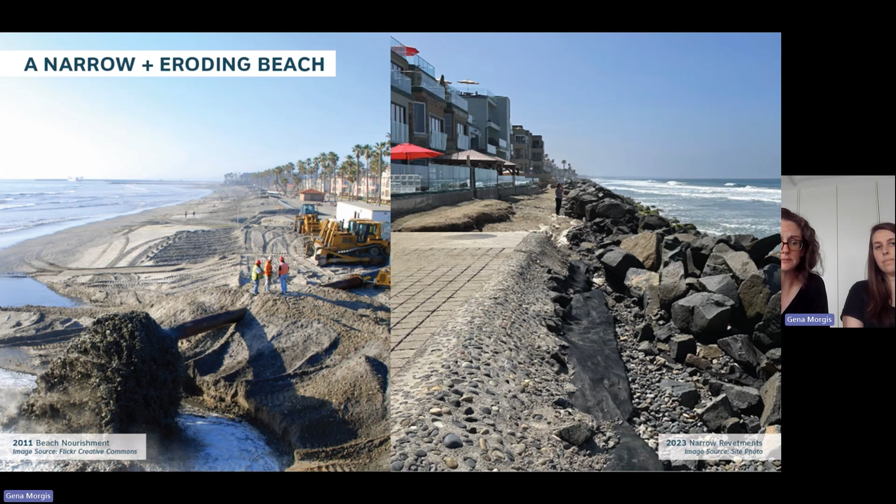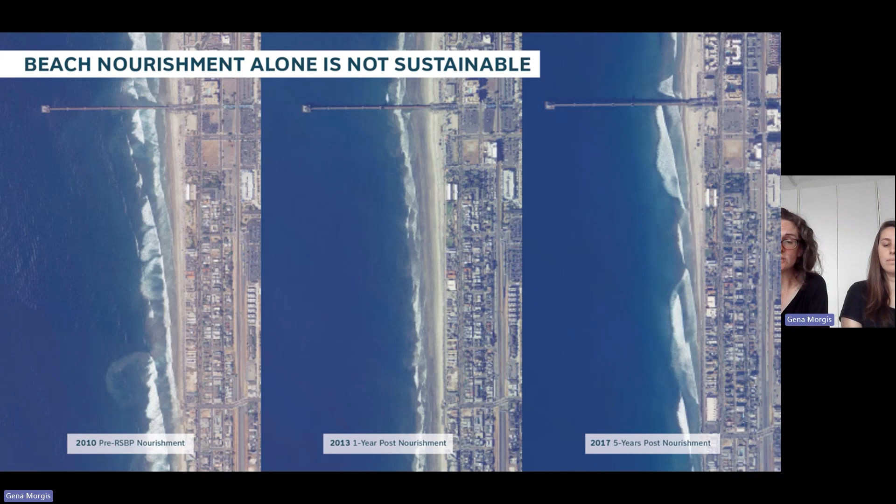But we know that this place is also under threat from both near and long-term risks. And nowhere is this more visible than Oceanside's narrow and eroding beaches. Erosion and accretion are natural processes, but in recent decades, beach losses have been dramatic, leaving almost no beach left for the activities that sustain the places that we love. We also know that Oceanside's beach has been sustained through ongoing beach nourishment, but we know from this competition that nourishment alone is not sustainable in the long term.

We also know that the shoreline faces new challenges from increasing storms and sea level rise, and that these conditions are here to stay. And so to understand how we can adapt for the future, we also wanted to look at the history of Oceanside and Southern California beaches more broadly, to understand how we interact and can craft a design proposal for today and tomorrow.

And what we found is that the beaches we know and love in Oceanside are not necessarily natural. They have been shaped by human hands. There have been times when human actions upstream have increased sediment loads that are transported downstream to the beaches, and others where large quantities of sand have been added directly to Oceanside's beaches. For example, through the placement of material dredged from the harbors and lagoons onto the beach to create the wide sandy beaches we see today.

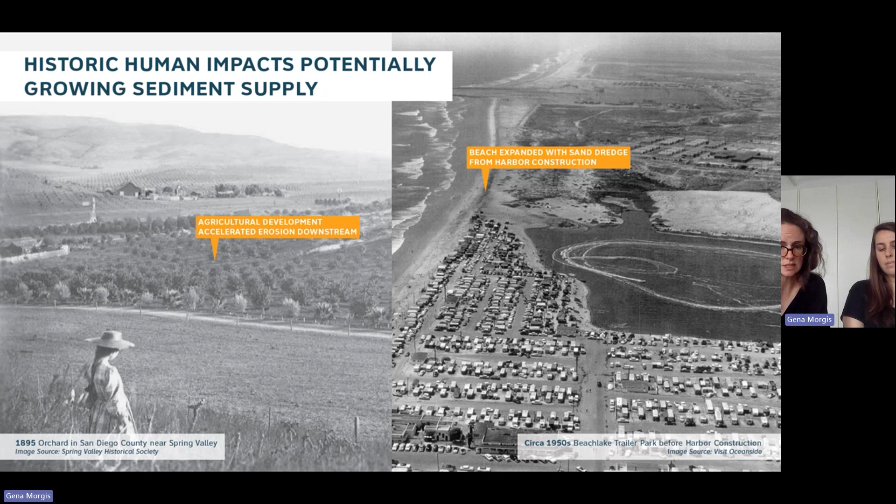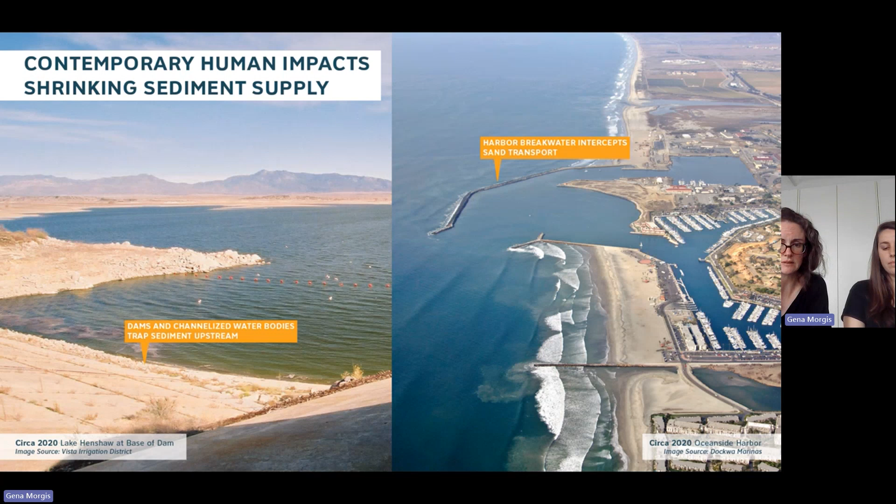Just as human actions have created beach over time, human actions have also started to contribute to erosion, both by cutting off tidal tributaries and limiting the sediment supply through upstream damming and channel hardening, to the interruption of natural sand movement along the shoreline, such as with the construction of breakwaters, coastal developments, and the revetments that go along with protecting that development. And so our approach and the design concept we're here to share with you today is titled Living with a Changing Beach. We acknowledge this change and want to develop an implementable, adaptable, and potentially replicable strategy for Oceanside.

When we spoke to you last, we presented 4 nature-based strategies that we think could be layered along the Oceanside shoreline in different combinations: the cobble spine, the cobble crests, dunes, and nearshore reefs. These are features that will need to be constructed. They are engineered, but they are based on naturally occurring beach conditions and dynamics that we can find in the Southern California coastline. The goal is to adapt these features to the realities of Oceanside today and tomorrow in a way that can sustain and expand your beach.

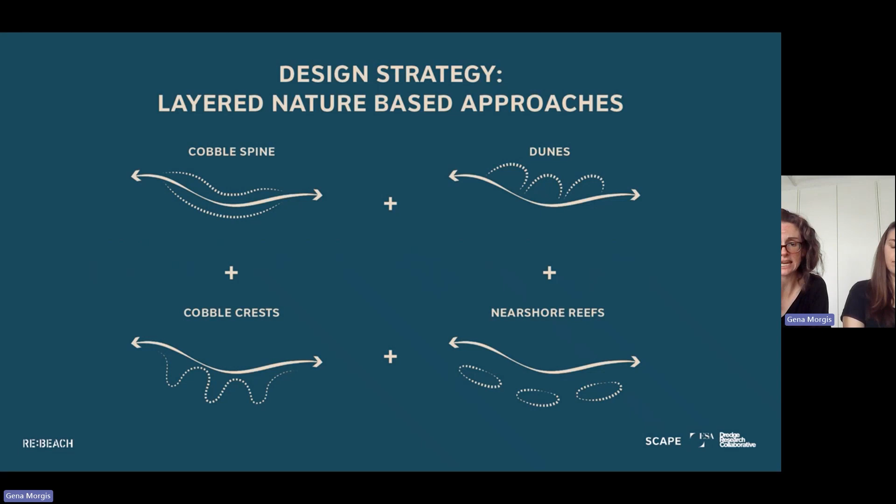First and foremost, that we want to test the ability of nature-based solutions to stabilize a perched beach and retain a usable sandy back beach area. We're going to use and draw from the materials and methods that are inspired by historic conditions of California coastal ecosystems. But we also know that we need to preserve access to a beach and support the vibrant social activities of the Oceanside beach, and do that in the context of our changing environment. So we propose piloting new physical and social configurations at the beach that can adapt to climate change.

And to do that, we want to develop a low impact project that also doesn't exacerbate negative conditions elsewhere. But it's important to be able to implement quickly and efficiently so that we can then study, adapt, and grow over time. There is urgency here. We want to enable you to incorporate those adaptive management techniques and manage the system over time, but also understand it and start to adapt it to new locations.

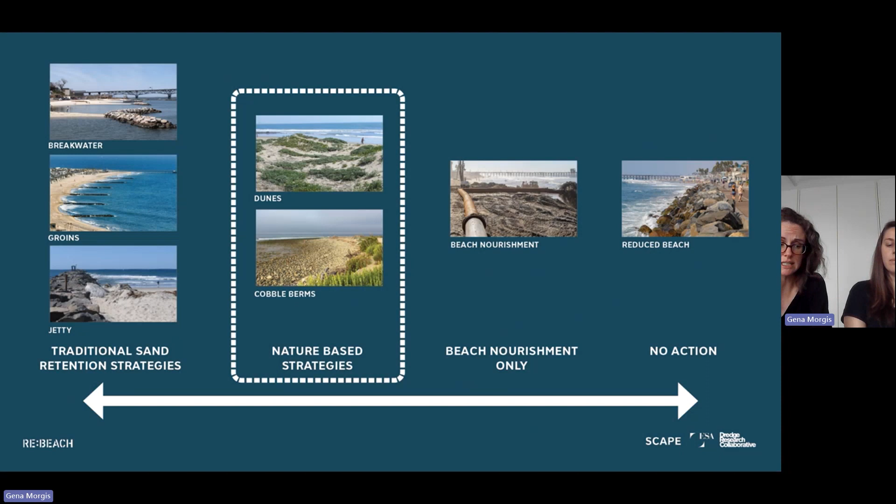And so to do that, we are proposing a pilot that has nature-based solutions for beach stabilization and expansion and tests novel nature-based systems with the potential to accrete sand. By doing this, we really hope to strike a middle ground between traditional hard sand retention strategies and the currently unsustainable practice of beach nourishment alone.

We know that traditional sand retention strategies like groins and nearshore breakwaters can be really effective sand retention, but they can also dramatically change the beach into something that doesn't work for the activities that you want to do there and that may have negative impacts on adjacent beaches. We also know, on the other hand, that beach nourishment alone requires consistent action and renourishment, and this may not be sustainable with the resources you have available over time.

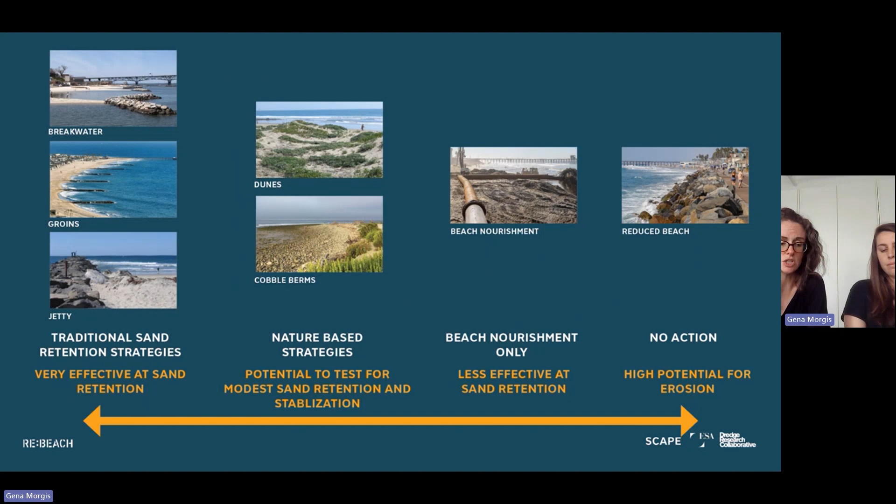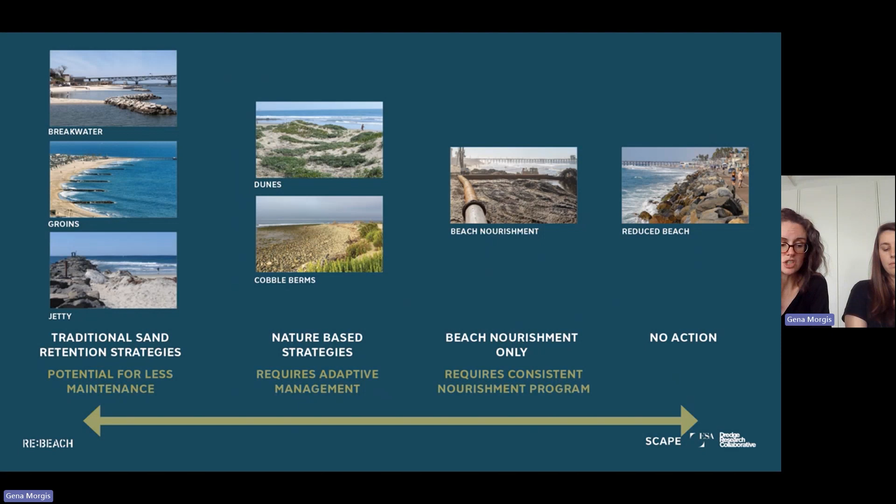Typically, berms and dunes provide stabilization, protection, and some sediment storage. In addition, through this project, we have the opportunity to test the accretion and retention potential of a novel nature-based strategy. And again, nature-based strategies will require adaptive management, but we will test and adapt that over time.

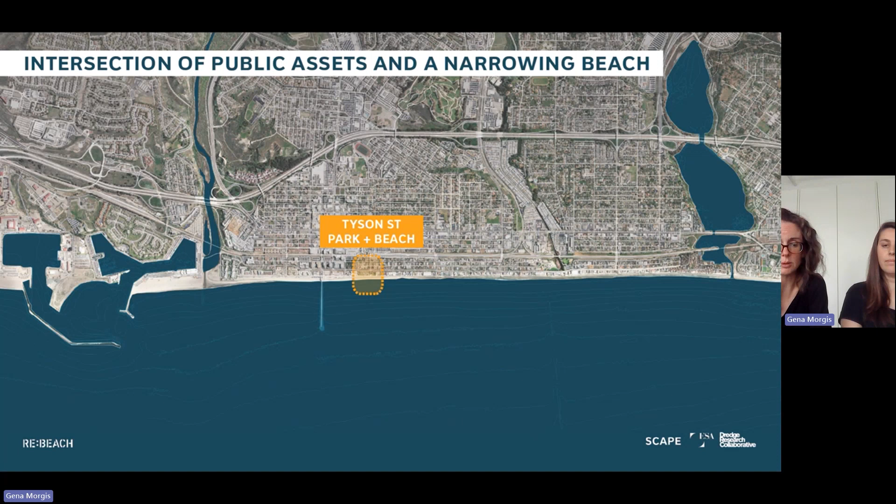So what are we proposing? We are proposing a pilot at Tyson Street Park. This is one project in one place, and we've chosen this place because it is an intersection of public assets and a narrowing threatened beach. The site at Tyson Street Park is already publicly owned land. It contains an existing cobble spine that we can build upon, creating a pilot that can be cost-effective and potentially replicable to other portions of the Oceanside shoreline. And we call this Dune Park.

To describe the design, I'm going to hand the presentation over to my colleague at SCAPE, Gena Morgis. Great. Thanks, Pippa. So I'm going to dive a little bit further into Dune Park and break down the nature-based strategies that Pippa has mentioned in the beginning of the presentation.

This is an image of Tyson Street Beach today, where we see the narrowing public beach, an existing expression of cobble at the shoreline edge, and the strand and the lawn at Tyson Street Park. And when we look at this in plan, we can once again see the tapering of this sandy beach until it ultimately becomes entirely an exposed cobble spine. Tyson Street Park has a lot of lawn and a lot of pavement. It's quite a different landscape than the natural Southern California beach landscapes we all know so well.

In the Dune Park pilot proposal, we combine our 4 nature-based strategies, dunes, cobble spines, cobble crests, and nearshore reefs, to build resilience along the Oceanside shoreline. We propose to shift the strand back toward the bluff and realign the public assets of Tyson Street Beach to create space for native dunes, habitat walkways, and create a new park experience based in native Southern California landscapes.

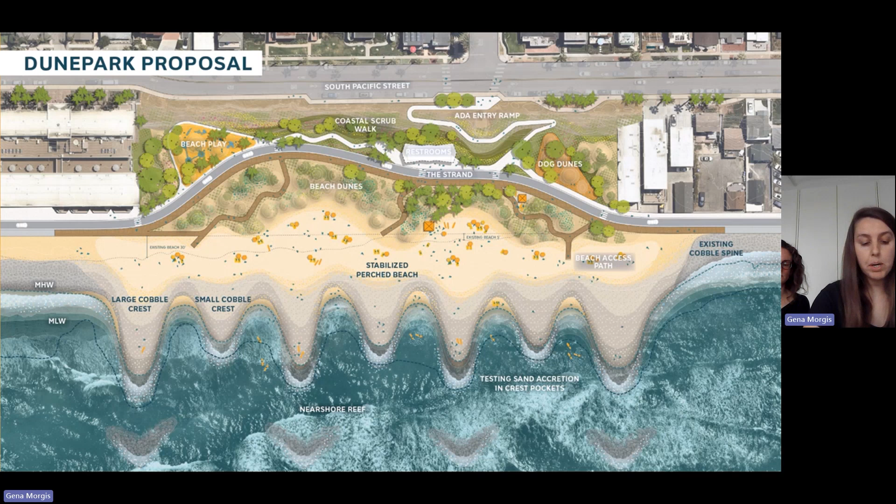This also creates room for a new beach experience at Oceanside. We propose to expand and stabilize the beach and shift the focus to an elevated perched beach where people can recreate and have a new space.

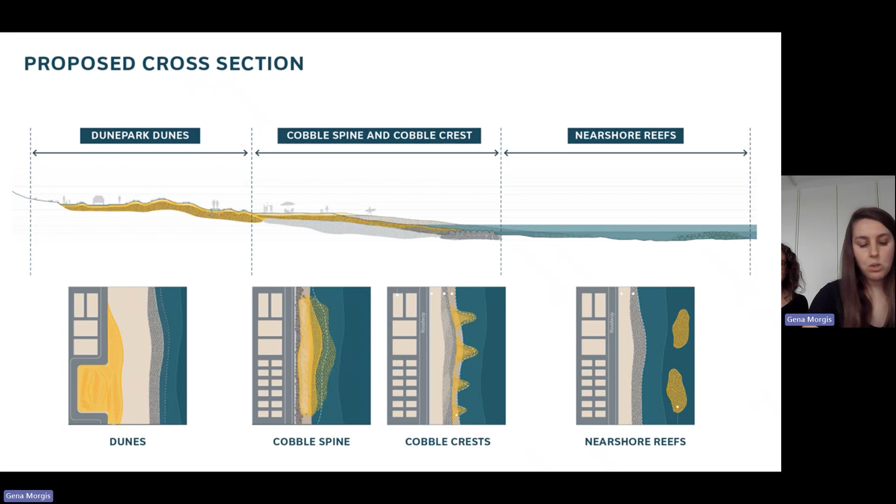Our team proposes to reconfigure this cross-section. What we will do today is walk you through the Dune Park cross-section design piece by piece, starting from the upland portion of the dunes, looking at the beach condition at the cobble spine and cobble crests, and ending with the nearshore reef system. All of the parts of this proposal work together.

While these two projects have different goals than Dune Park, we could look to them for inspiration on how they were able to repurpose local materials, including cobble and dune features, to create innovative resilience strategies. So we propose to transform the static condition of Tyson Street Park into one that is immersive and dynamic, one that highlights a native dune ecosystem constructed with a cobble base.

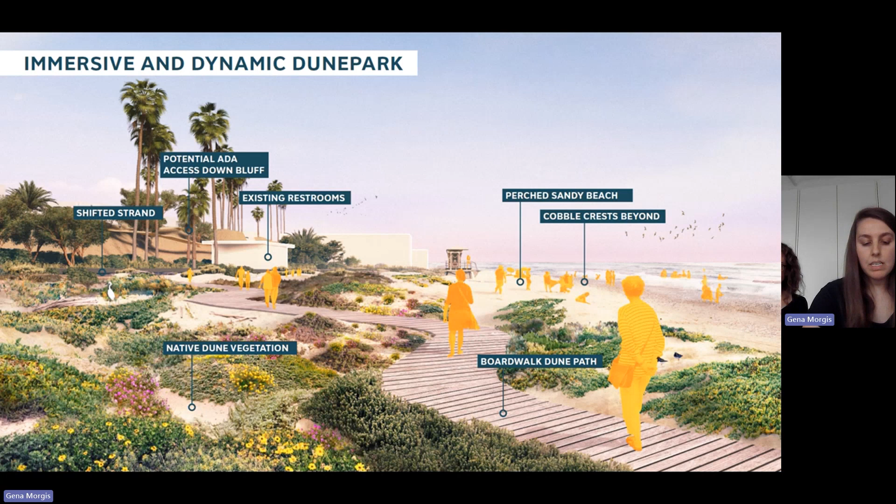We propose boardwalk pathways that move throughout the site, allowing users to experience the dunes. In this view, which was taken from the existing location of the Strand, you can see the proposed sandy beach created through repurposing Tyson Street Park and expanding the beach shoreward with the cobble crests beyond.

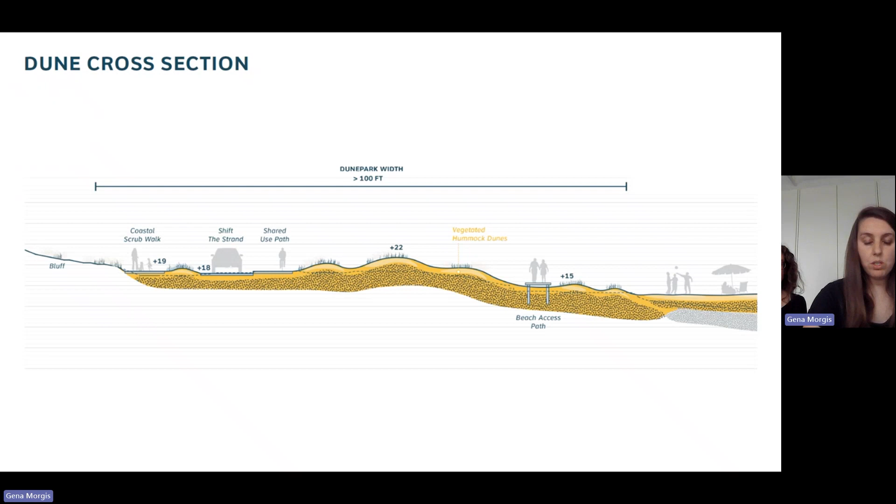And so when we look at the cross-section in further detail, you can see the dune area width is about 100 feet wide. Where Tyson Street Park was, we've converted the grassy area into a dune with cobble and sand. Dunes are designed at elevations that respond to anticipated water levels today, as well as in the future. And we want to emphasize that this space is also a social park for recreation, as programs like the beach play and a designated dog park are incorporated into the dune design language.

Importantly, we've also created a sandy perched beach to really do the things that people love to do on the beach, like laying out their towels, sitting in the sun in their chairs, putting up an umbrella, or laying out their surfboards and engaging in talking to your neighbor.

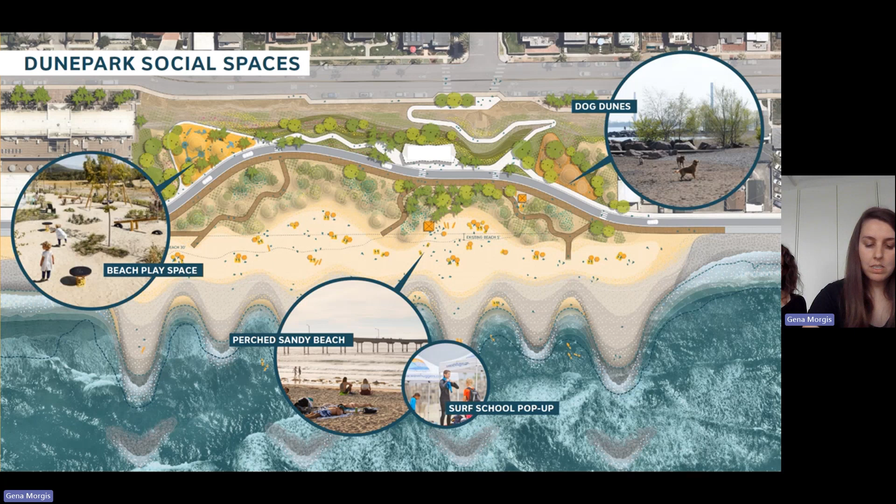This image shows how the play space might feel nested at the base of the bluff. You can see that the Strand is adjacent to this space and weaves through new landscapes that echo the look and feel of Southern California. So the cobble spine and the cobble crests are the nature-based approaches that we're going to walk through today.

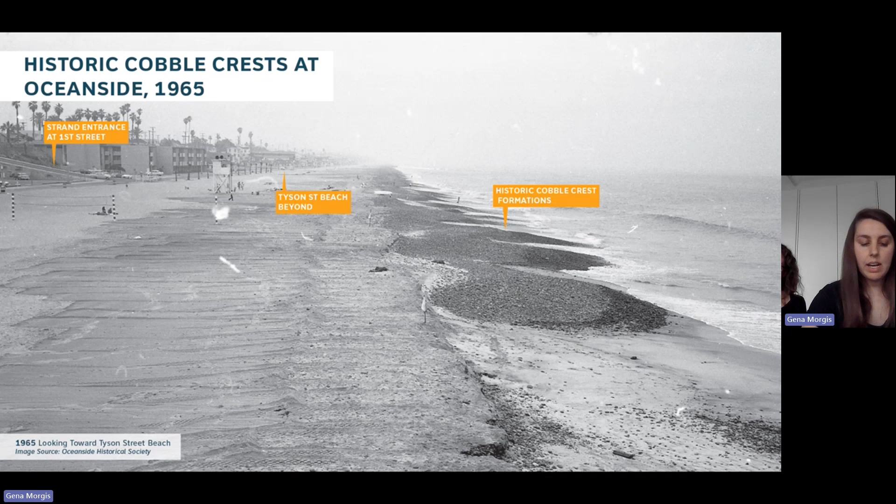And so, like Pippa has mentioned, what we want to do is use all of the material that we have on our site and build upon it through the conversion of Tyson Street Park and through the elevation and extension of the existing beach out towards the shore. We've designed the perched beach at a higher elevation so that it will lift away from wave action and prolong the lifespan of the perched beach.

And the condition that we have today in terms of beach is about 5 to 30 feet maximum of sandy beach area. And what we're proposing with the Dune Park design is the ability to stabilize a wide sandy perched beach by lifting it above and landward of the existing cobble layer, adding a sand cap and establishing cobble crests coming out into the water.

This creates an opportunity to stabilize the perched sandy beach, widen the existing conditions by both expanding the beach towards the shore and converting Tyson Street Park into new beach spaces. The design also creates moments to test the potential accretion within the cobble crest features.

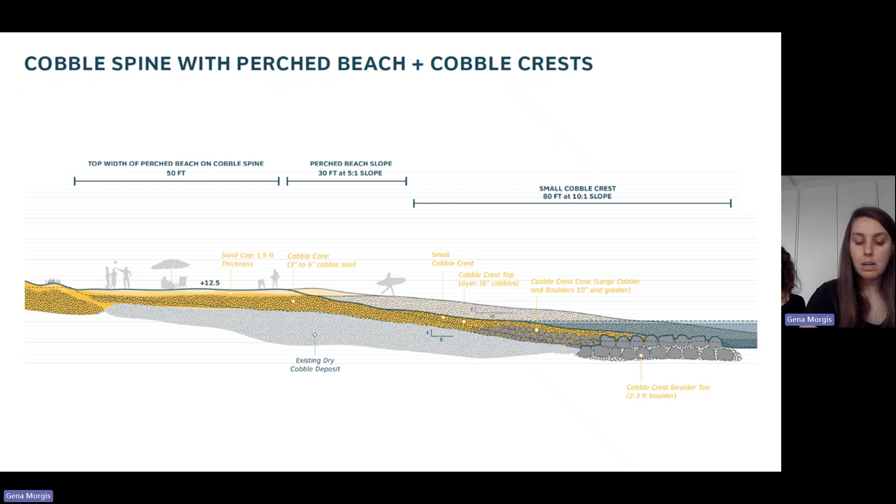And within the cobble crests, as they slope down into the water, you can see we're using some different materials. We propose to use larger cobble that transitions into boulder-sized material perpendicular to the shore in the core of the crests, and then larger boulders around the seaward edge of that formation to protect the toe of the cobble crests. This is anticipated to provide some stability to these features.

And we also want to recognize that there's an incredible amount of work that's monitoring change along Oceanside's beaches. The Grunion Greeters are monitoring Grunion runs, and SOS is monitoring beach transects. And this pilot is a great opportunity to link up with these efforts to understand change over time and monitor how the pilot could potentially function. Grunion would not likely be able to use Dune Park because they cannot get above cobble and they avoid cobble areas, but Grunion Greeters could see if Grunion end up using areas in the project site to inform modification of features in the future.

We have also heard from the community that the movement of cobble is constant. And so what we would like to do with this project is figure out ways of tracking cobble to understand potential shifts in the dynamics of this proposal. And Scripps has put forth a potential pathway to do so through their cobble tracking project.

So our last strategy is nearshore reefs, which are offshore structures once again inspired by Southern California reefs. Of course, natural reefs like these are massive and connected to extensive bedrock formations and a different material than our proposal, but the Corona del Mar example illustrates the connectivity of an offshore reef to a nearshore feature.

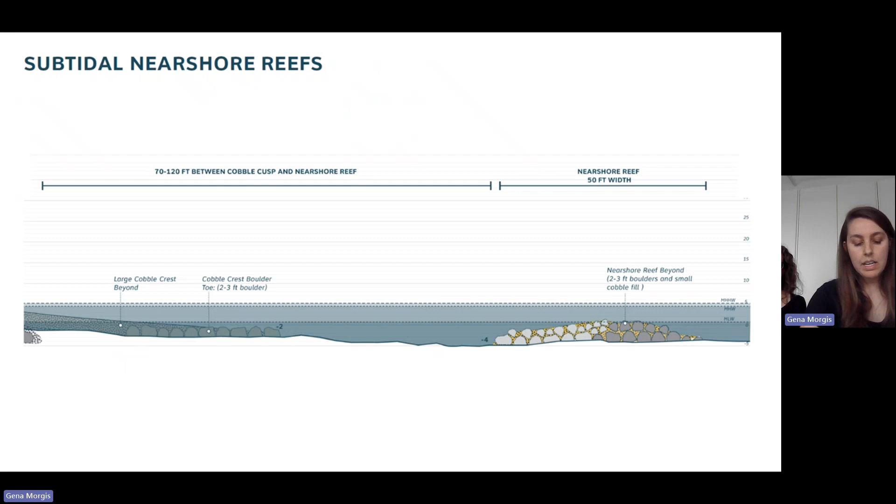In this section, you can see how our nearshore reef proposal is a combination of cobble and larger boulder material. It is fully submerged under the mean low water line, and this is meant to work in reciprocity with our cobble crests to offer the ability to test the potential accretion and retention of sand in between these features. Now I'm going to flip it over to Pippa to talk about Dune Park performance.

Thank you, Gena. In summary, Dune Park is going to create an expanded sandy beach area by repurposing the existing Tyson Street Park and creating a perched beach above and behind a cobble spine. The proposed sandy beach is sustained and stabilized by upland dunes, which can be a sand source, as well as the cobble spine, cobble crests, and nearshore reefs, which slow sand offshore and where we have the ability to test the potential of this novel feature to accrete sand over time.

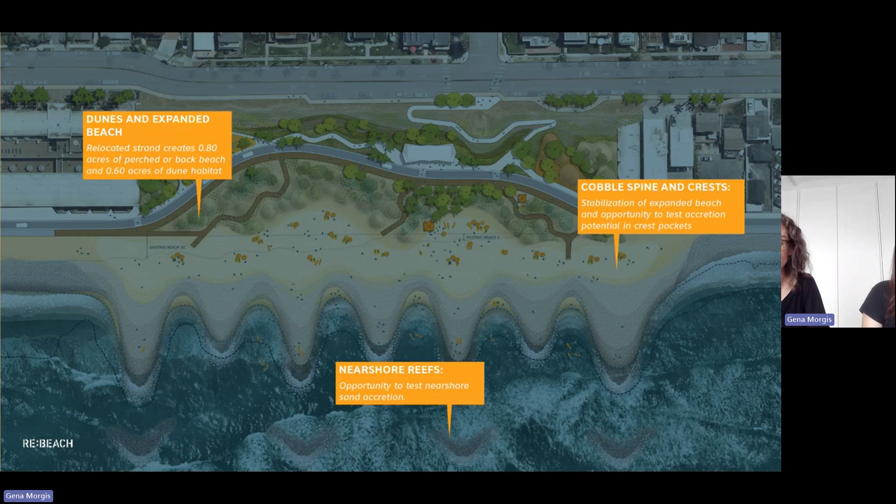But it's important to remember that Dune Park is more than just a sandy beach realignment and extension project. It is an opportunity to transform the Oceanside waterfront. It not only creates a perched beach to sustain the uses and activities you enjoy today, but Dune Park creates a new, exciting opportunity for the social and ecological activity of the future through repurposing upland spaces and building out the beach. It really charts a new future for Oceanside that celebrates your past, your present, and creates spaces for new opportunities to emerge. And we hope that you agree.

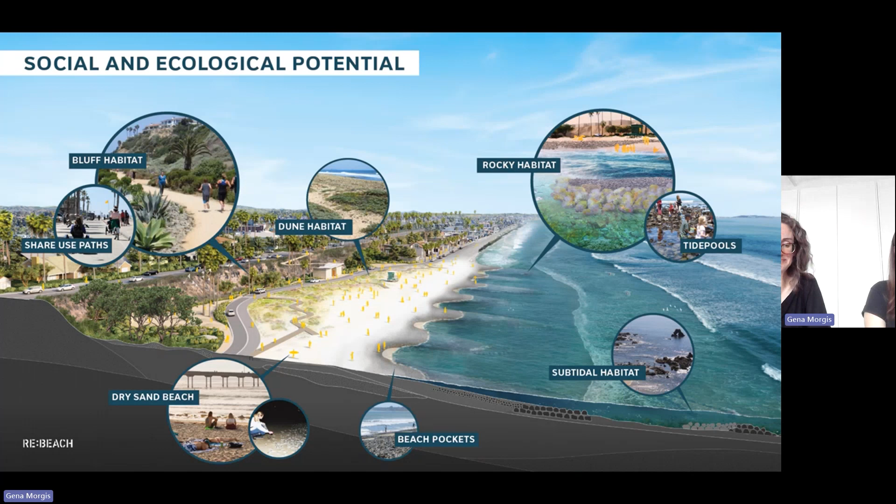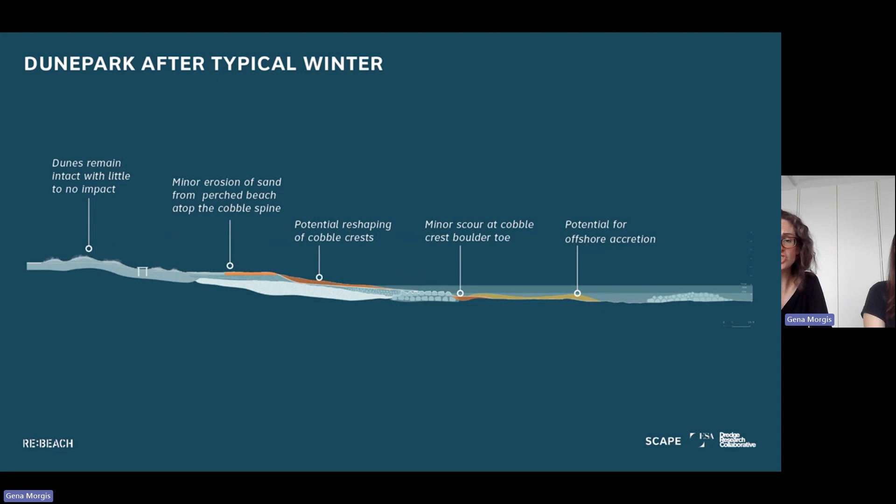It is also important to remember and acknowledge that it is still and will be a changing beach. Today, seasonally, you see the shoreline change. And we know that the sand and cobbles, as Gena described, will still shift in our design. This may require periodic maintenance over time and even maintenance and nourishment after movement of the dunes and the beach after a large storm.

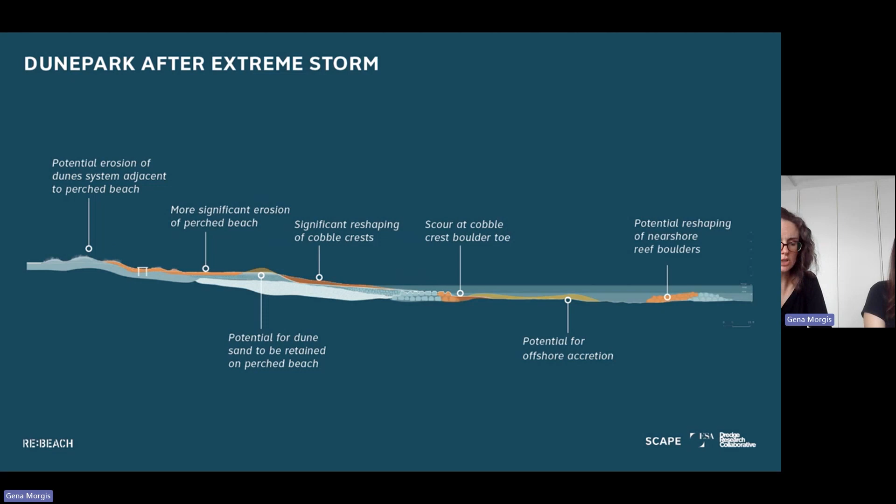And so the other thing we want to come back to is this idea of the Dune Park as a pilot. It is a pilot for this Tyson Street Beach shoreline, but it's also about testing and learning from these strategies. With the information on how these features work in situ, we can refine, modify, and adapt them to other locations in Oceanside. We want to reiterate that these are just conceptual locations where cobble spine, cusps, and nearshore reefs could be replicated and expanded.

These would need to be studied, but we really believe that this adaptable, replicable, and scalable approach can help create an engaging, aspiring, and sustainable shoreline for Oceanside tomorrow. I'm now going to turn it over to James Jackson from our partner ESA to wrap up with a technical briefing on the project.

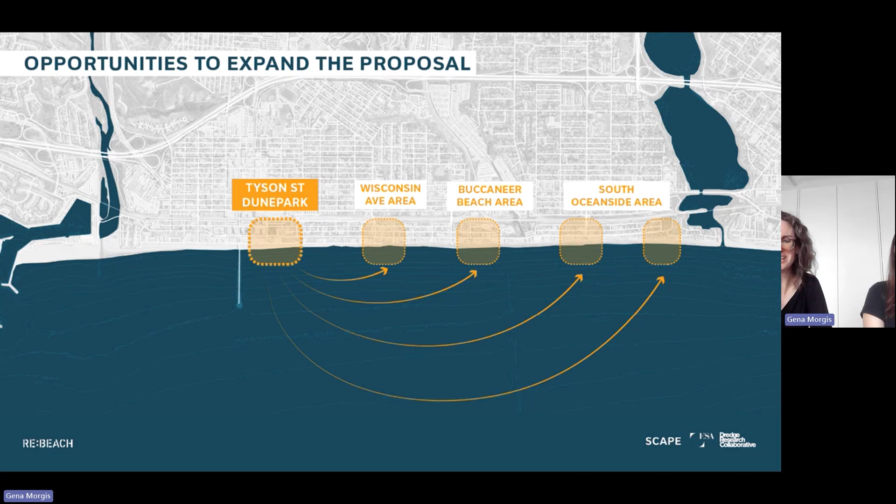Thank you so much. Hi, folks. My name is James Jackson with ESA. I'm going to take a few minutes to talk through the design criteria and feasibility considerations for our proposed concept. I'm going to take a high-level approach here. Feel free to pause and read through some of the more technical details in these following slides.

I'd like to start with beach performance. Our proposed concept at the Dune Park will expand the perched dry beach along this 600-foot segment of shoreline. The expanded beach will include additional beach into the ocean from this existing strand of about 50 feet. And with the realignment of the strand, will create new expanded beach area up to 150 feet wide.

The goals for the Dune Park concept are to apply nature-based approaches to encourage a more resilient beach and retain more sand in the nearshore. And these features will be more flexible and adaptable with modest amounts of sea level rise.

Our proposed concept provides a number of environmental benefits. We're intending to create and restore habitats, including sandy beach, coastal foredune habitats, enhance the bluff habitat behind Tyson Street Park, as well as introduce additional rocky intertidal and subtidal habitat.

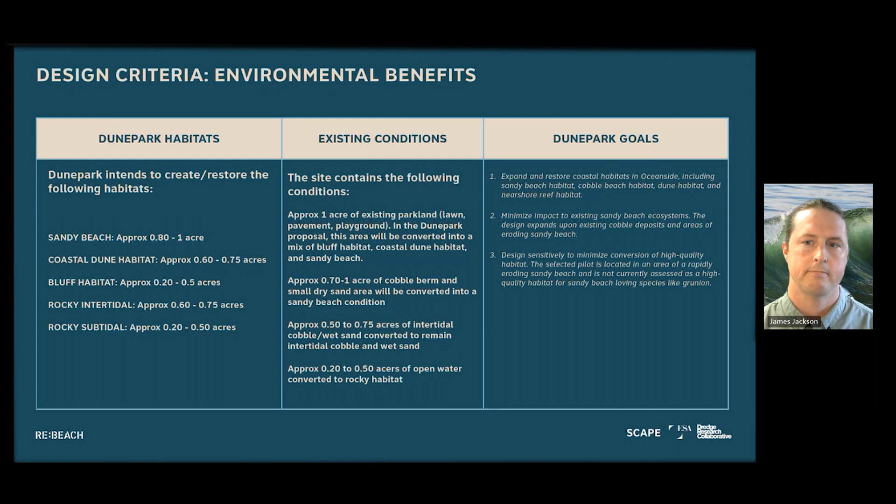The cobble and boulder nearshore reefs have the potential to create novel surfing experiences, and we'll also be incorporating a monitoring plan to evaluate the impacts to local surfing conditions at this location.

Maintenance of the Dune Park concept will include actions to maintain the cobble boulder elements as well as the placed sandy beach. We anticipate that the seaward face of the cobble berm and cobble crests will adjust with larger swell events and stormy winters, and may need to be reconfigured after each winter season. Over time and after these types of events, the cobble may eventually disperse or sink, and the time frame is not exactly known, but there will be a need to reconfigure and introduce additional cobble and boulder material as larger impacts are experienced on this feature.

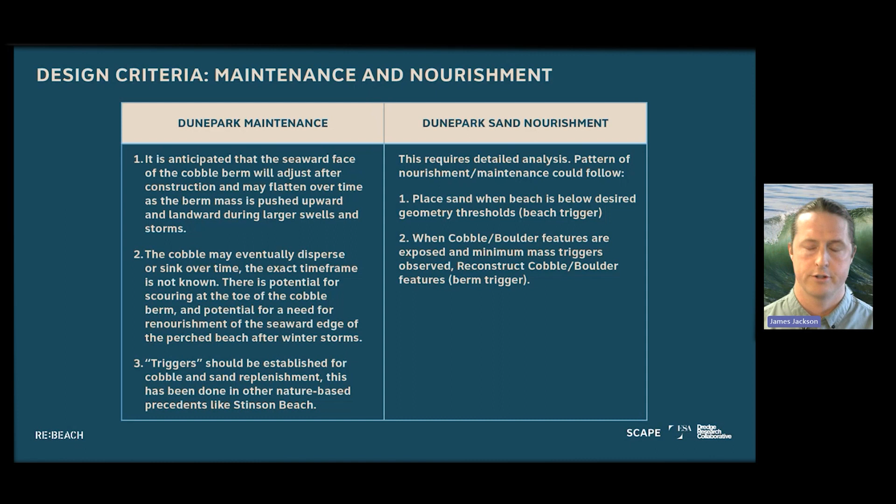The perched beach that we are proposing on top of the cobble berm may be impacted during severe winter events where wave run-up can erode parts of the beach, and so this dry perched beach may need to be renourished, particularly along the seaward edge of that beach as large swell and winter storm events occur. The parameters and values for construction costs and operations and maintenance considerations are still in development, and we'll be providing additional detail in the next phase of this design competition.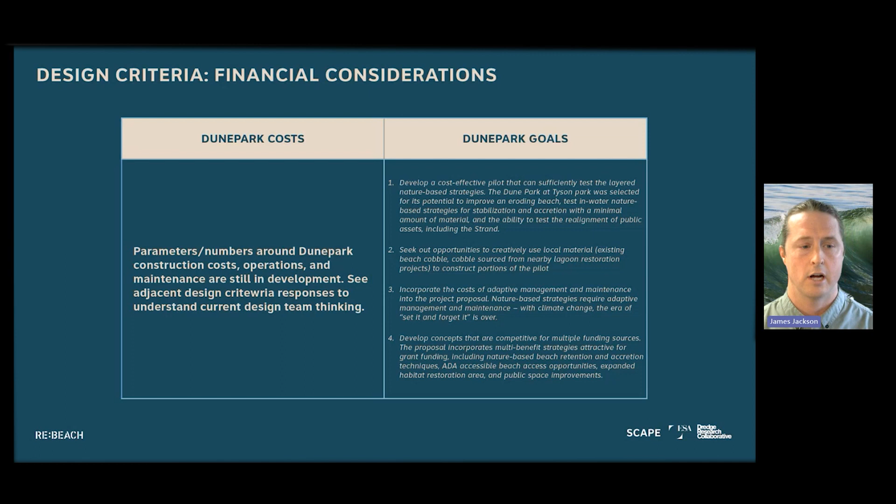Finally, I wanted to talk about a few regional considerations, and the Dune Park concept provides an opportunity to pilot and test natural shoreline enhancement approaches in an urban setting. And there's, I think, a great potential to be a leader in Oceanside in implementing such a nature-based solution and evaluating the potential for its applicability to the rest of Oceanside and the Southern California region and beyond.

The intent of this nature-based approach is to slow the longshore sediment transport in the area, but not completely eliminate the longshore transport, and thus minimize impacts to down and up coast communities.